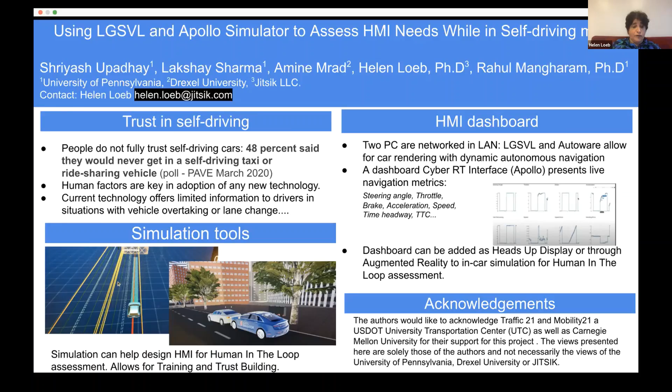The main aspect of the technology, which has a patent attached to it, is the mixed reality, augmented reality. It relies on the ability to combine in a person's field of view elements that are real, that would be your real car, yourself, maybe your passenger, and elements that are virtual, that would be anything that's outside the car. And that allows us to program these scenarios and immerse people into this, like pretend they should think they are driving, even though they are safely sitting in a stationary car. So that's the objective of the project.

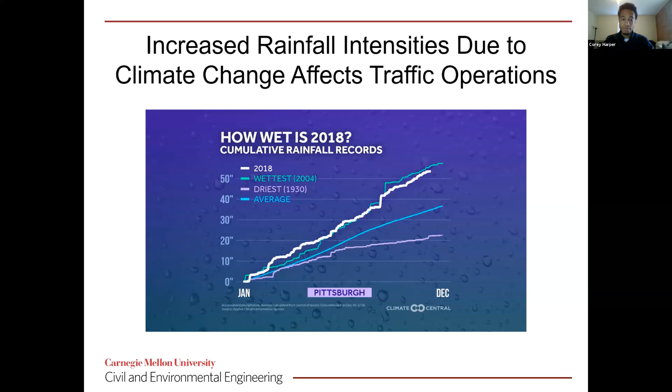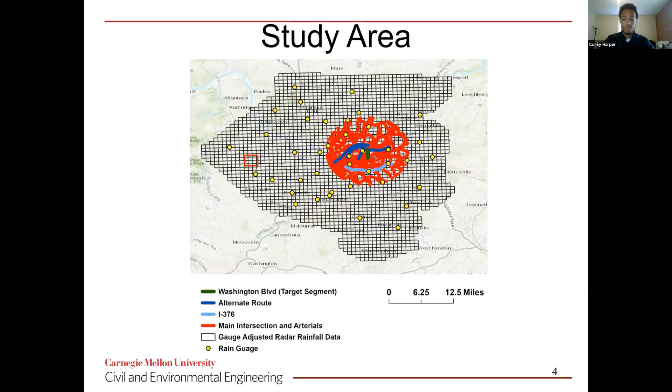Most studies use one rainfall gauge, like the one from the National Weather Service near the Pittsburgh airport, shown as a red dot. If I used just that one rain gauge, I wouldn't have any more information, and I would assume that the rainfall there can tell me what the rainfall is anywhere else. What we're hoping is that by including this additional rainfall data, we can develop a more accurate prediction model.

One of the things we did in the study was group rainfall data by wind direction, because in Pittsburgh, the southwest wind direction is the prevailing wind in the region. We did this because we're building a machine learning model, and it's really hard to discern why the model picks some rain gauges over others. So we needed a way to discern why they were picking these. Also, rain clouds travel with wind, which likely means these rainfall features will be the best predictors of rainfall in our network 30 minutes from now.

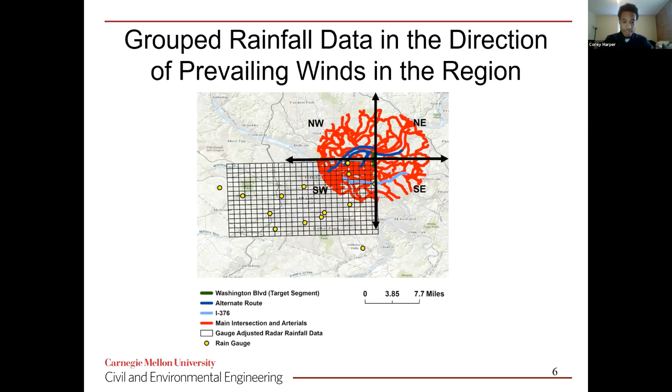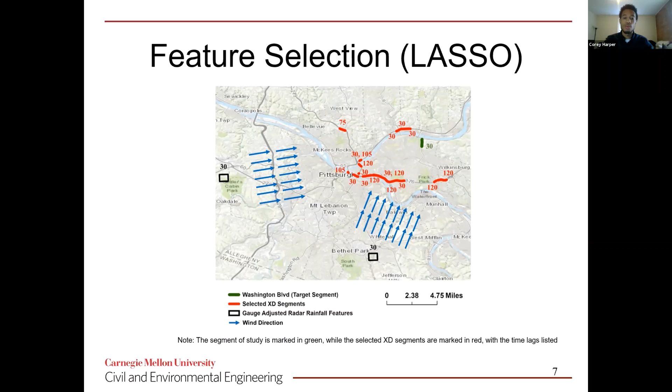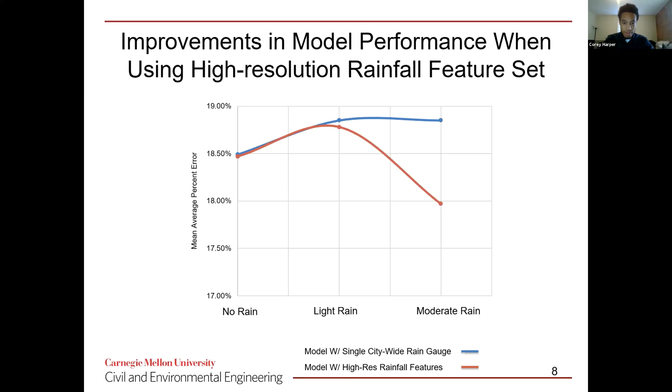I know a lot of you might be saying, well, you did all this and it doesn't seem to be substantial. But even small improvements in traffic safety could provide huge benefits. For example, there were 900,000 crashes that occurred in 2018 in inclement weather. Even if you address about 0.1% of these crashes, you could see over $160 million in cost savings annually.

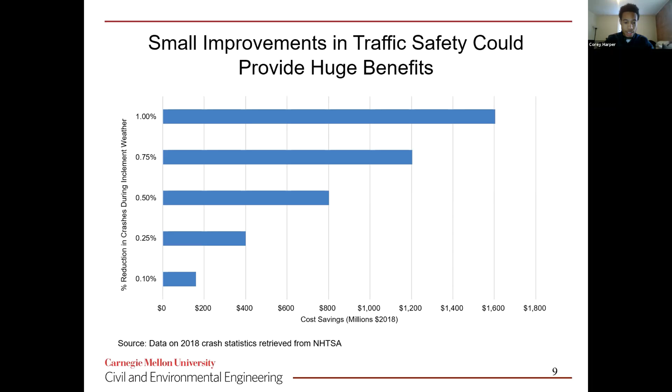Right, so here's some policy implications. Flood warning alerts from the National Weather Service are very generic. Future broadcast messages could be more detailed, letting drivers know which roadways to avoid and which roadways to shut down. Currently, Washington Boulevard shuts down when water accumulation on the roadways reaches a certain threshold.

What if we could shut down roadways and redirect traffic before waters reach dangerous levels? And as you saw before, societal benefits can be substantial as we avoid a lot of crashes that occur in inclement weather events. So thank you, everyone. That was it.

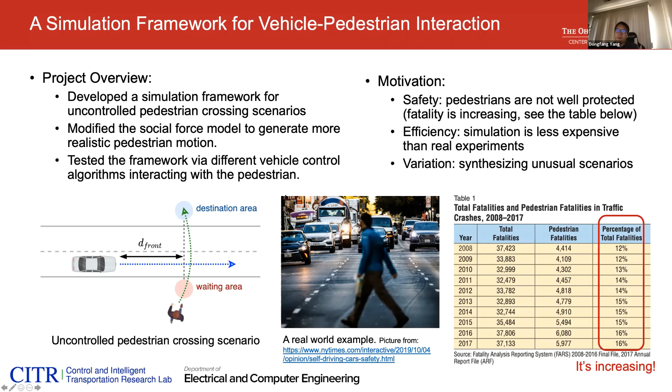For this framework, we proposed a 3-layer framework, and for both the vehicle and the pedestrian, they all have 3 layers. One layer is responsible for the perception, and the perception layer is responsible for sensing the environment. After sensing the environment, the second layer is called the interaction layer, which is responsible for making decisions and generating actions. Once we have the actions, they are sent to the last layer, called the motion layer, which describes the physical motion of either the vehicle or the pedestrian.

For pedestrian, we have a 3-layer architecture, and for the vehicle, we also have another 3-layer architecture. Due to time today, I will not go into the details of these layers. But generally speaking, for the pedestrian, in the perception layer, there is a gap estimation module which estimates the time gap. The time gap is defined as the time for the vehicle to go from its current position to the crossing position. For the motion layer of the pedestrian, it's basically point mass dynamics, and it receives a virtual force as an action, which will change the pedestrian's motion accordingly.

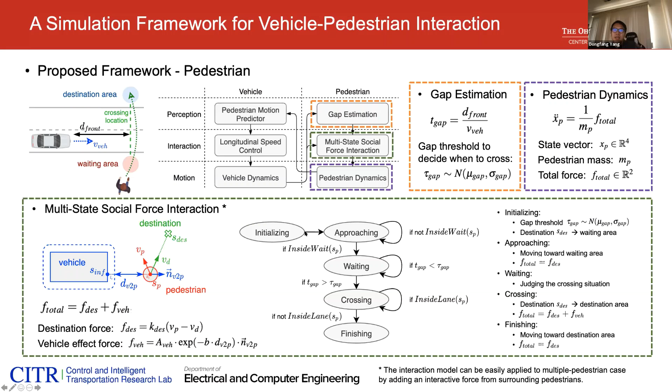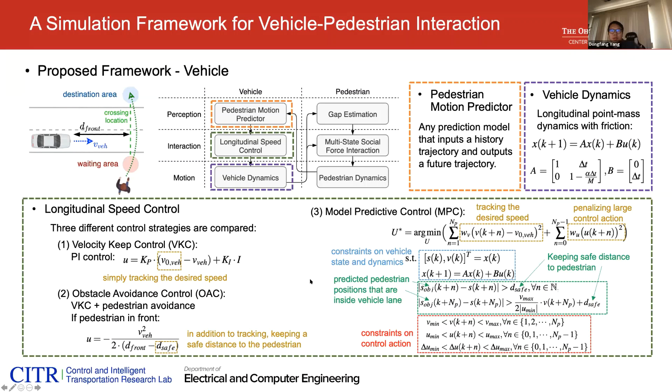This might be too complicated, so I will just skip this part. For the vehicle, it's a similar thing: we have a perception module, an interaction module, and a motion layer module. For the interaction, we have tried 3 different controllers, and we want to compare these controllers. I will skip these slides and just show you some quantitative results.

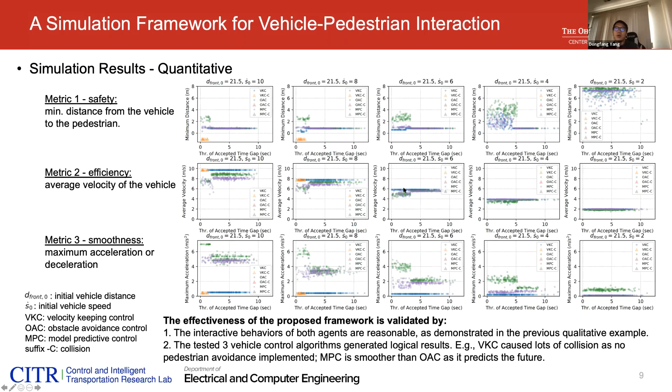Sorry about the delay. Yeah, that's basically what it is. That's very helpful, thank you.

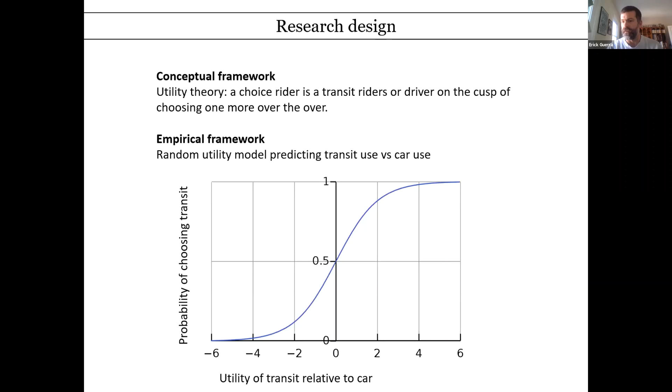I take a pretty simple research design, using utility theory, and basically I say that a choice rider is someone who has close to a 50% probability of choosing transit. I use a random utility framework, estimating a binomial logit model, for the choice between someone taking transit and using a car. The sample uses data from the Philadelphia region.

Philadelphia has relatively high transit use. It's sometimes referred to as the biggest poor city in America. It has very high use of its urban bus network, and it also has substantial commuter rail service into wealthy areas. The term 'the main line' has become synonymous with the wealthy western suburbs.